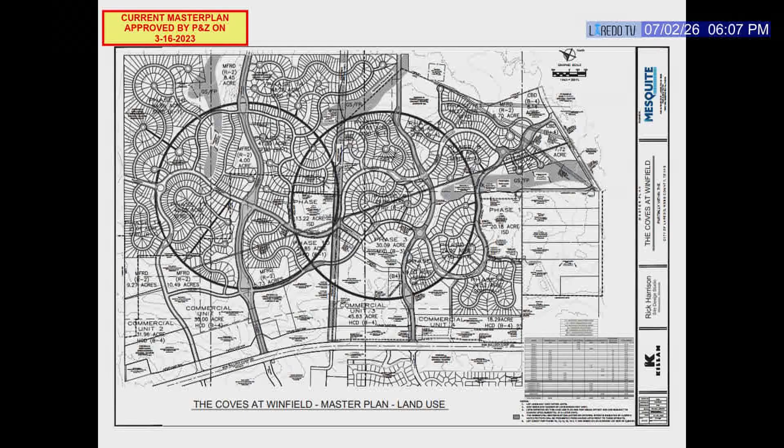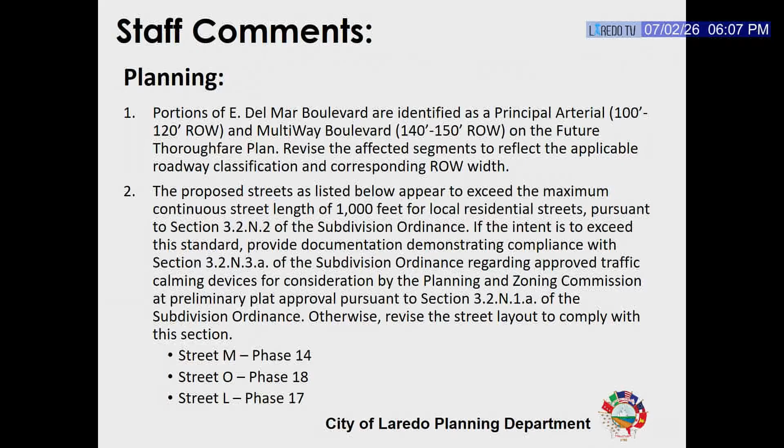Location view, aerial view, the current plan — this is the master plan that was approved March 16, 2023 — and the master plan revision submitted. Comments from planning, comments 3 to 6, comments 7 to 11, parks, and traffic safety, comments 3 to 8. And the proposed motion.

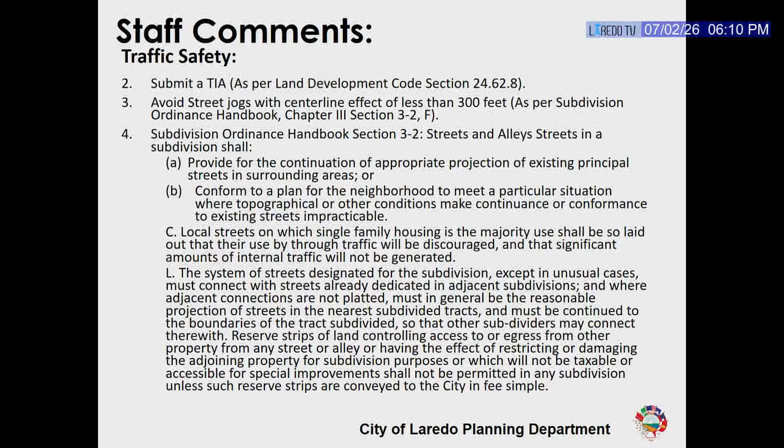Staff comments: planning comments 1 to 2, 3 to 6. Next are parks and fire. The next is traffic safety, comments 4 to 4, comments 5 to 6. And the proposed motion.

Okay, yes sir? Good evening, Mr. Chairman, members of the commission, or Madam Chair, who just, I saw walk in the door. I'm going to hand out a packet here for everybody to see. Mr. Wires, I'll let him go ahead and get started.

Hello, Mr. Chairman, Commissioners, Danny Wires for the record. I just wanted to give you a little background on the tract and what we're determined to do, and that's affordable housing, and the unique characteristics of this tract.

For several years, in fact my entire career, I've always looked for tracts of land that we can take care of the lower half, and now it's the lower 80% of Laredoans that are looking for houses. Well, this tract, by fate or...

I first offered to buy the Richter farm from their grandfather 40 years ago. And the Richters are very proud of their farm and hard to deal with. Last November, the opportunity to buy it came up through months of negotiation on prices. We came to a number that would work solely for the purpose of affordable housing. And the reason it works is it's...

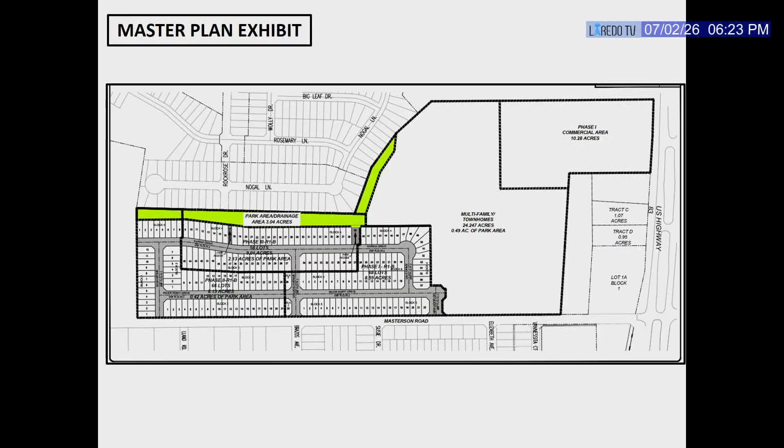And then we're having to explain it to you when we're asking you to remove it from the agenda, from the comments. So just a comment - I wanted to reiterate kind of what Mr. Novato did, but I think I got too far into it because I still have these two other things I want to talk about. So just in reference to that, I wanted to let you know.

As far as planning goes, we agree with all the rest of the comments except for comments number 1 and 2. Comment number 1 is referencing the extension of Rockrose Drive, located along the northern boundary of the subdivision.

So if I can get this to show up. All right, let's see, where am I? Yeah, like that, let's see. Yes, like that, right there, okay. Okay, let me get a pen. Rockrose Drive is actually - let me see where I'm at, it's actually right here. Oh, is that it? No. Why don't you put this one up? Let me follow. Oh, okay. Well, it's because this one shows a little bit more of the circulation, so let me get on this side of it, and that'll actually help.

Rock Rose Drive is actually - you had an arrow to it - right there, that's Rock Rose. This is Rockrose Drive, and this is what they want to extend down into the subdivision. As you can see, this particular River Hills subdivision came back before you. At that point, staff asked for that particular extension to be extended. The engineer was not in favor of it because he said he has a loop - River Hill Loop, which comes all along here. This is River Hill Loop, the internal circulation they had for the subdivision. Their signalization is on the north side, and on the south entrance or exit, that's just where they go in and out - it's a right turn in, right turn out.

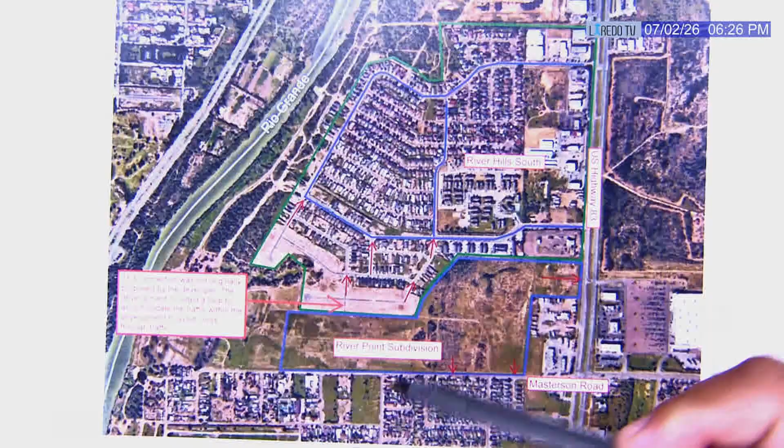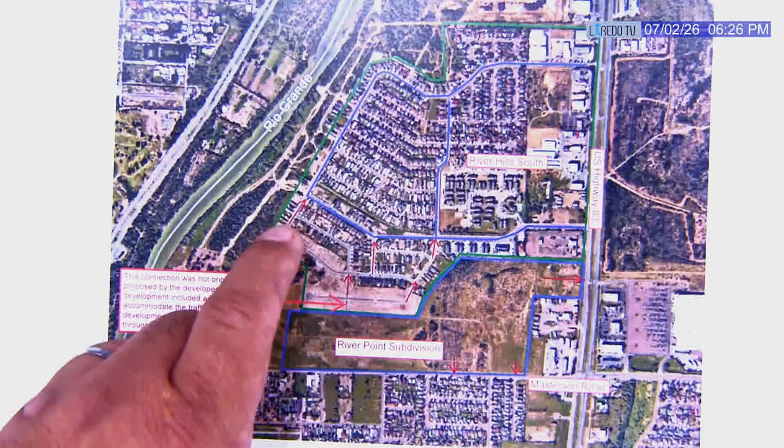So they have that cared for, and what we feel is this is kind of burdening the last piece of this tract, the last development going in here, having to find a way to bring this road in. Initially it's not a through street, because the through street is over here on the south side.

This is Brazos, a 50-foot road that was just extended to see that we had a connection, and it doesn't go anywhere but to the next road up. So it's not a through street, it's just creating additional traffic. And so what it does to us, if you bring up the master plan, can you pull that up? You see where Rockrose is at right there? I don't have a pointer.

Right there. But it comes straight down and goes into the middle of one of our blocks. So that block will now carry the circulation that comes from River Hill Drive, or River Hills subdivision, completely. It's gonna cross through and come out on Brazos Avenue. That's gonna create a dangerous situation in our opinion, because you're gonna have additional traffic flow going there as opposed to what we'd have just from our subdivision generating itself.

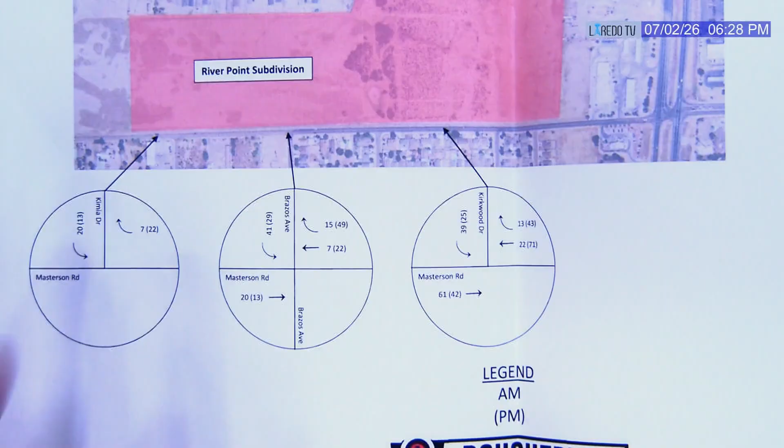We have, from the traffic engineers assisting us with the TIA, you can see... I think you have the exhibit inside your packet, but the first one is Exhibit A. Okay, Exhibit A, you can see the far west drive, which is Kimia.

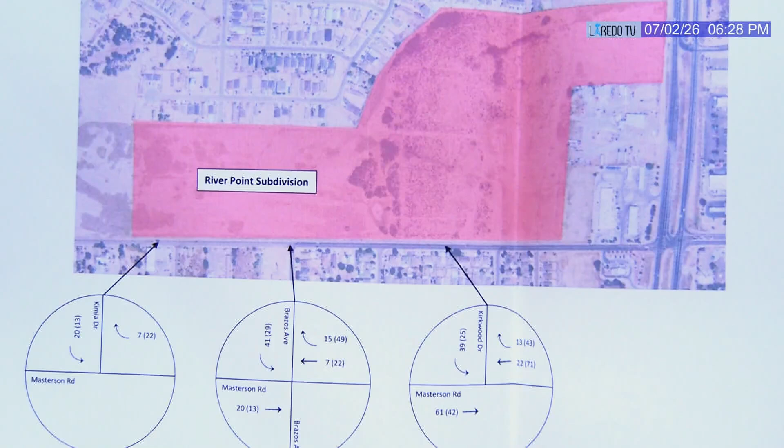That one generates, at least — this is just the generation of flow based upon the subdivision, what you see right here in front of you, which is the R1B. You can see it'll generate probably about 30 trips per day, whether coming in or out, depending on whether it's AM or PM. And then you can see the center, and it keeps adding up as you go and work your way towards Masterson, towards US Highway 83 along Masterson. So that is what you see just with our subdivision.

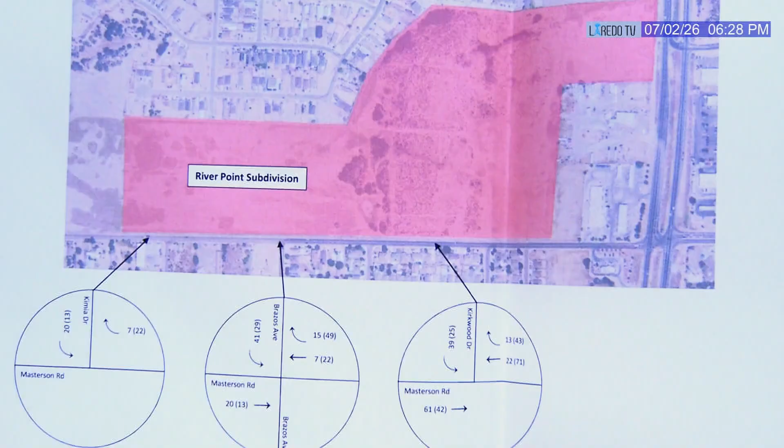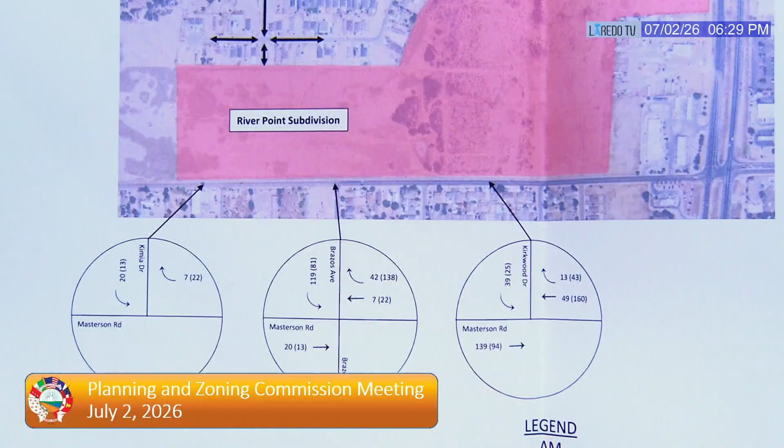Now, if you turn around and bring in this one — this is adding in the traffic flow that would come from River Hill subdivision. Is that Exhibit C? This is Exhibit C, yes ma'am, this is adding both of them. Actually, Exhibit B shows just the traffic flow from River Hill, but this one, C, adds them all up together.

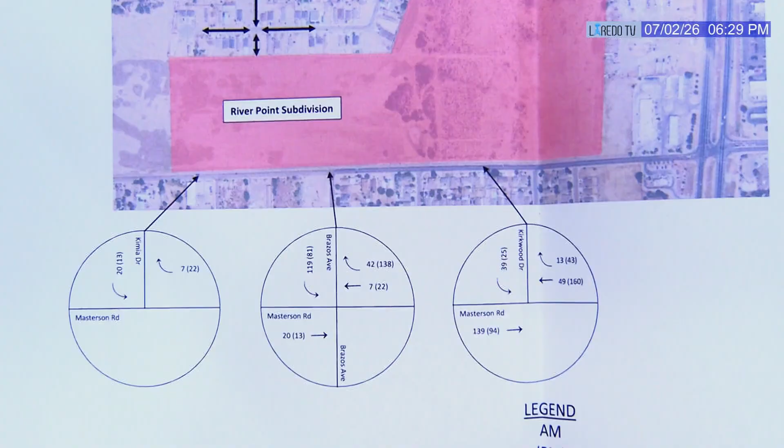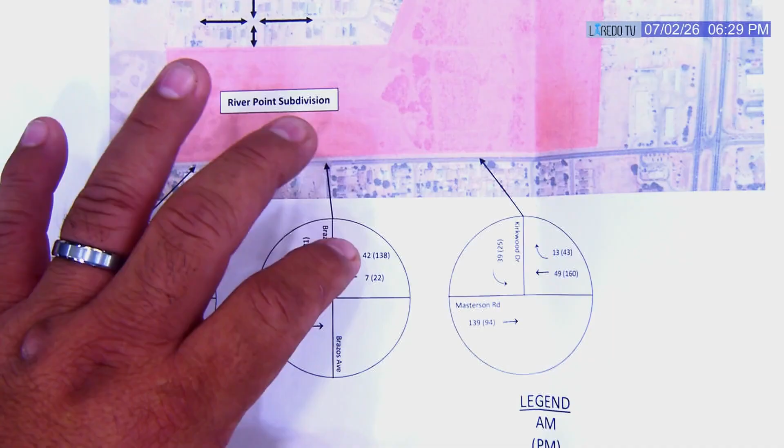So, Exhibit C, as you can see, the majority of the traffic is gonna be concentrated on Brazos, and that adds up — if you start looking at it, you're seeing about, you see 100, it says 119 and 81, that's 200 trips, and then you see 42 and 138, that's another 180. So, that being said, you're seeing 400 trips. 400 trips being generated on a daily basis, and you're putting it in that little small section where those lots are gonna be. It's gonna create a dangerous area.

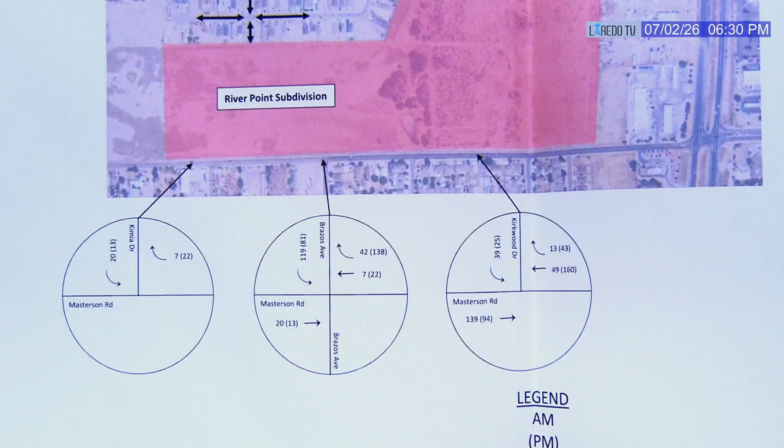Maybe not all the time, but at some point, with that many cars going there, it's gonna create a problem. So that is why we are concerned with the fact that they want us to extend the road into the subdivision. And we understand their concern, but it's hard to accommodate something when it's gonna create a problem in that particular sense. It's gonna be a dangerous problem, because we're gonna have those 400 trip generations coming daily. That's what you're gonna be seeing.

Can I ask a question to staff? What is the purpose, or the reasoning behind the unusual case I see here on planning, item 1, that on is just connecting the subdivision with the street, and then passing also a drainage canal, to connect these two subdivisions. What was the reasoning behind it?

Well, the comment is just quoting the subdivision ordinance, right? It just says pursuant to the subdivision ordinance, the street system designated for the subdivision, except in unusual cases, you've gotta connect, right? So that's why we noticed on the master plan that the stub out on the north subdivision — they were not proposing the connection in their master plan, right?

So that's what we're calling out. The subdivision ordinance requires everybody to abide by the stub outs from previous or recorded joining subdivisions. That's why we're saying make sure that you connect, and revise your master plan in order to connect. I think that's what you're asking about. Yes.

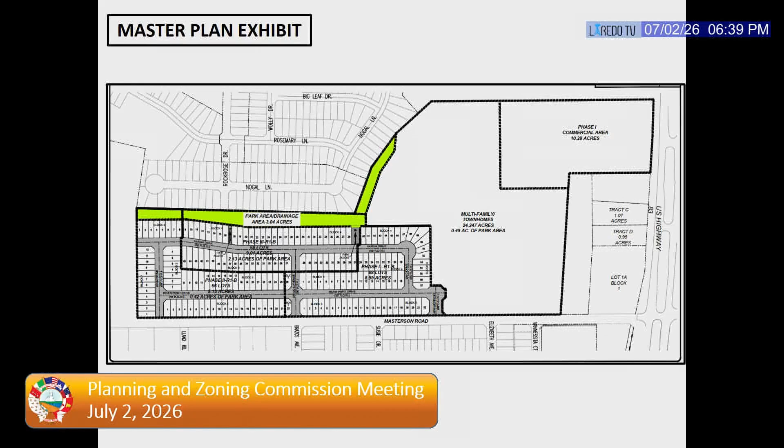And then it looks like the subdivision north, Rock Rose Drive, also has access to the park area, so it connects through Rock Rose, yes ma'am. Yeah, so actually for walking and biking, it's probably safer to keep cars out of the area if the purpose is pedestrian safety. I agree.

Does Rock Rose currently connect to what you're proposing to have as a park area? That's where it dead ends, yes sir. It is already in existence? Yes, and we looked at it. It also meets the turnaround standard for fire, so the fire truck is not in a dead end.

But Ms. Portillo, that's an excellent point. In fact, Luis brought it up this morning, that instead of spending money on a $200,000 plus road, let's spend the money actually making these improvements, because this is a nice level piece of land, beautiful as it flows down to the river. Let's go ahead and improve those hike and bike paths for park access.

River Hills has access to the linear park also, and that is a benefit to both an existing subdivision and to the new one. And yeah, we're trying to promote walkability and biking, and yet we're doing a road. So we're talking out both sides of our mouth on the plan, but I like that idea. Yeah, I think it falls under the unusual cases.

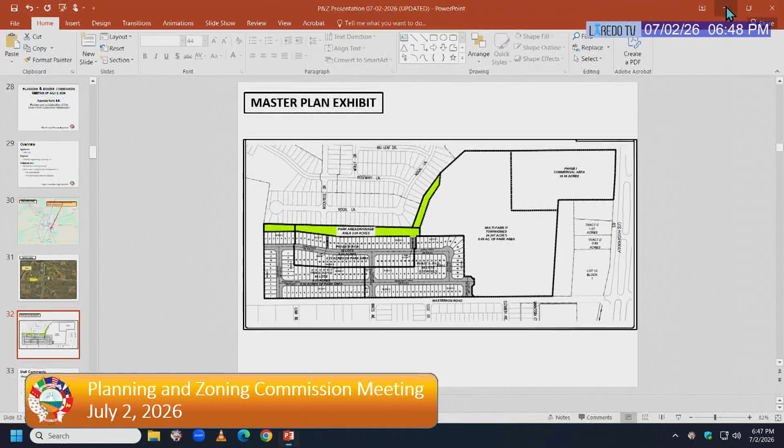Okay, because it brings up the subject we had last time. There's gonna be a lot of cars parked in the street, adding to traffic in a street that's already full of cars parked in the street. R1Bs are required to have 3 parking spaces on the lot. Required and used are two different things, but we know that. The ordinance does provide at least, acknowledges the increased density and the need for that extra parking on property.

No, Mr. Montgomery, you've seen it before, just like I had, checking our subdivisions at 7:30 to 5:30, and that's why I disagree with the RICO guys. They haven't lived the streets of Laredo. They say people want parks, not parking. All of my customers want more parking - that's more important to them than that.

So you've got cars parked on both sides of a 50-foot right of way, and then add another 400 cars more. You're asking for problems and delays.

Who did this traffic analysis? Was it a third party? It's Dougherty Engineering. When we come back to you with the higher density, a multifamily deal, which requires planning with the builders, and lot design and park incorporation and all that stuff, it'll be a full-blown deal.

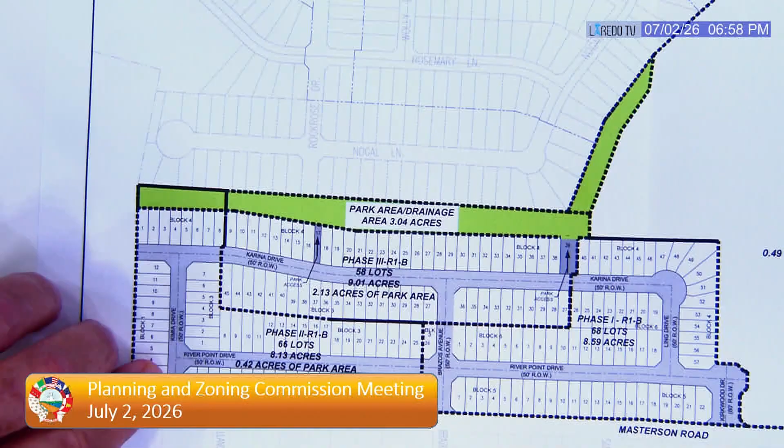The one to the far west, right by the river, we added that in because we have a sewer line that needs to go in, and the city doesn't like sewer lines outside of the road. So that road is to accommodate the sewer line, but the whole idea of the 300 feet is to prevent conflicting turning collisions. But if you look, if Frank can articulate it better than me, there's no traffic when you get to the west end.

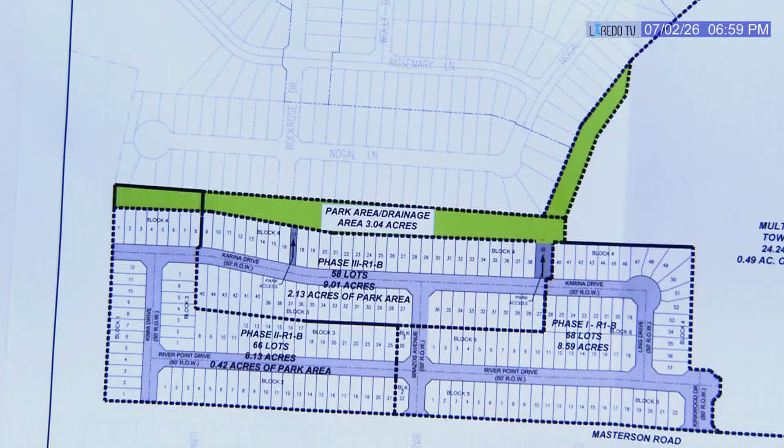We were thinking it's just traffic. I mean, you can't put medians right there, it's just a regular 50-foot right of way, so a median would not work there. So we're thinking something like signage or coordination instead, since a median is a little difficult there - the road isn't very wide. Yeah, that's what I'm saying, in that particular area you can't put a median.

But we'd be more than happy to work with traffic, Mr. Peña, and make sure that we put in what the city would require. I don't know how you want to reword that particular comment. I guess we could keep the comment as is, or coordinate - I guess the 'or' would work, right? There's 'or' and then coordinate with the traffic department for possible median and or traffic mitigation measures. That works, yes.

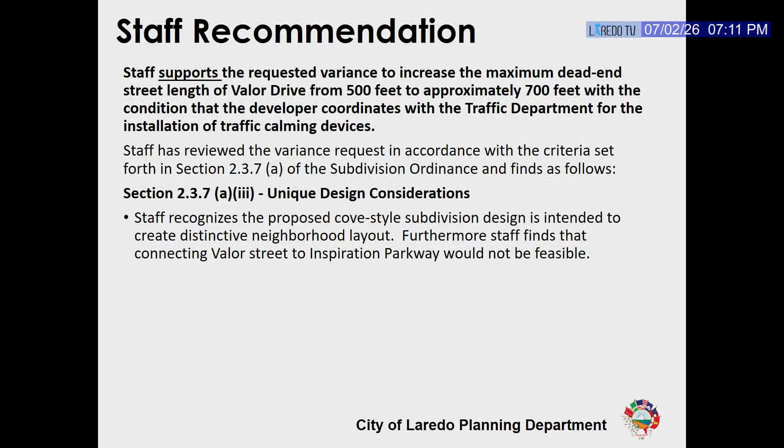The staff recommendation in the packet said initially staff does not support, but after conversations with the engineer and developer, we went ahead and supported the variance for the following reason. We recognize that the proposed Cove-style subdivision design is intended to create a distinct neighborhood layout, so as staff we found that to be a unique design consideration for the variance.

Because this is a variance request under section 2.3.7A, the commission by a 2/3 majority vote of those members present may grant the variance. Pursuant to that section, the commission shall make findings to justify the decision to grant the variance, and those findings will then be put into the official minutes of the meeting.

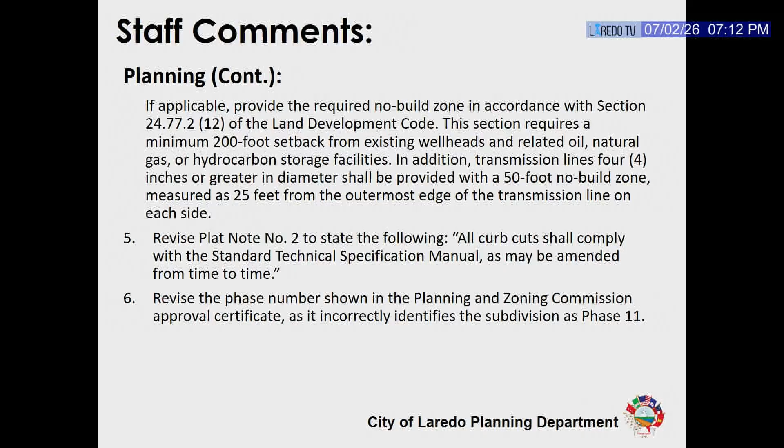Staff comments: planning items 1 and 2, 3 and 4, 5 and 6, 7 through 10. Comments from Parks and Fire and Traffic Safety, 3 to 7, and the proposed motion.

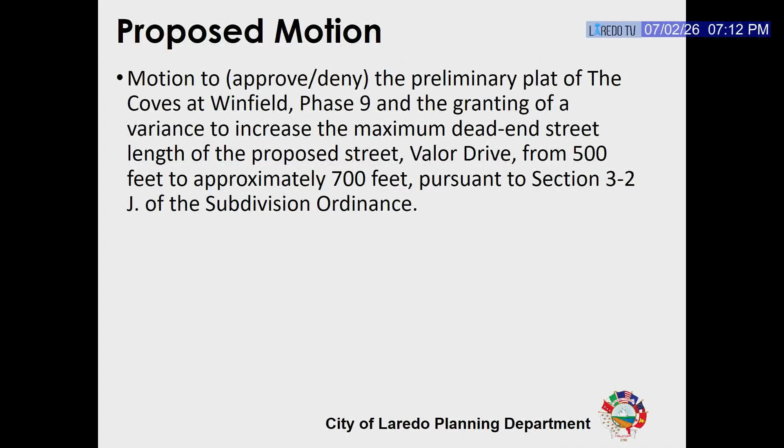This is a public hearing, is someone here to speak for the design? Yes, Orlando Navarro for the record. I don't know if we can get the projector.

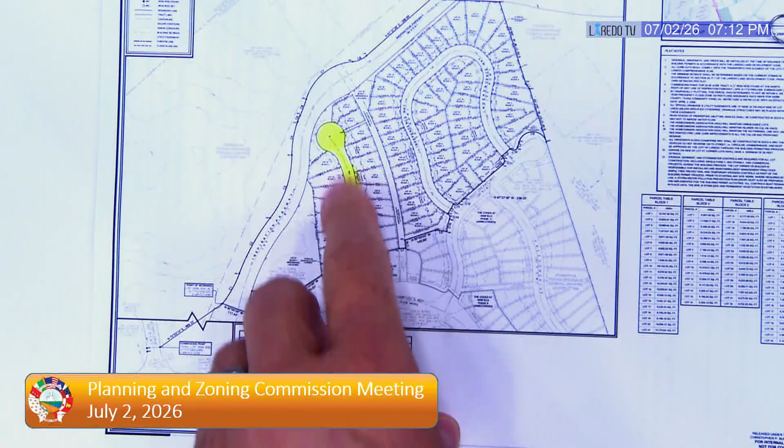Mr. Vedati, can you tell? There you go. So, all that being said, we have this road right here, and what we did was we made it a cul-de-sac because we didn't want traffic to hit this major road, so we're having it come out this way.

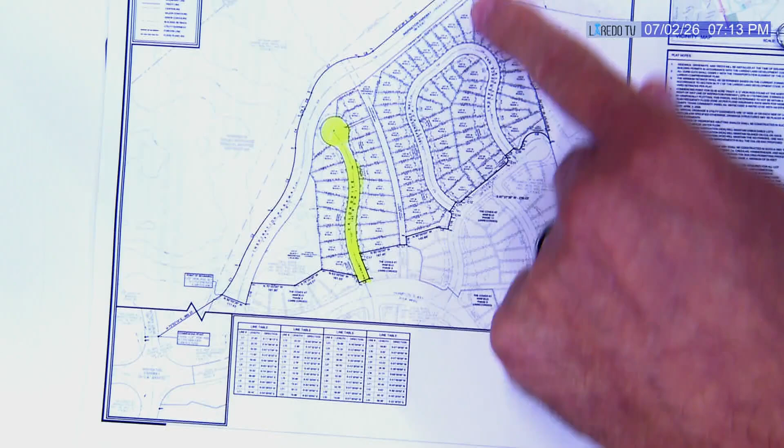So we did this for more of a safety issue, and because we did that it extended our street 200 feet. But the purpose was just for safety, so that you don't have left turns, and you could see the curvature there. We didn't want to come out right there because of the danger of the line of sight.

Mr. Chairman, we had a really good conversation with the applicant's representative today. If you notice in your packet, we had originally looked at this and according to the requirements under the code couldn't find the necessary justification, but after those conversations they brought to our attention some very important points with regard to the length.

They really have two alternatives: they either shorten the length of the street, which would result in land that becomes typically unusable, and that's something that would trigger the variance request if it deprives the landowner of any reasonable use. Or, the other alternative would be to turn the road and punch out onto the other road, which would eliminate the issue with the length of the dead end.

However, because of the curves, we noticed that the sight distances posed concerns, very significant concerns for us. So in this case, because of those conversations and the additional analysis, we were able to support this variance.

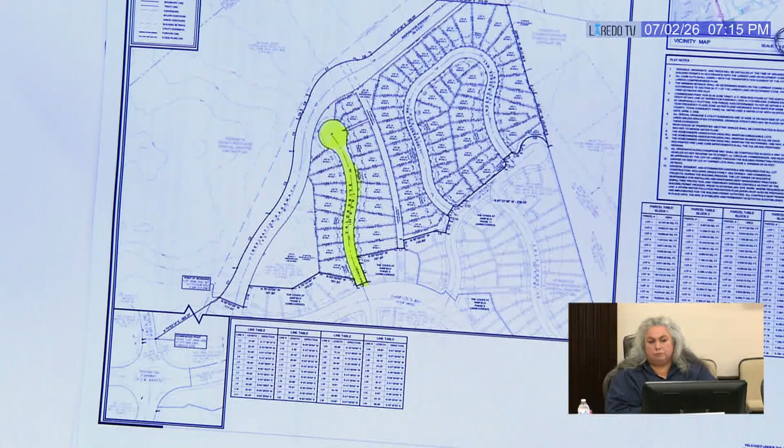Okay, that's it? Yes. We have a motion? Does anybody wish to speak against? Is anybody here to speak against? No? What are the wishes of the commission?

What would be the proposed amendment? Is there an amendment to the comment you would be okay with? No, I think they already did, we supported the variance. Oh, okay, but there was nothing against what's already here?

I'm sorry, I'm not tracking. When we initially looked at the variance request, we looked at the ordinance, and it tells you specific criteria for approving the variance, one, two, three, four. We couldn't find that it met any of those criteria.

But after talking with the applicant today, they were really gracious to come and talk with us and help us see more with regard to those sight distances. So would you say you're supportive of the variance now? Yeah, we support the variance. Okay, motion to pass the variance, subject to staff recommendations.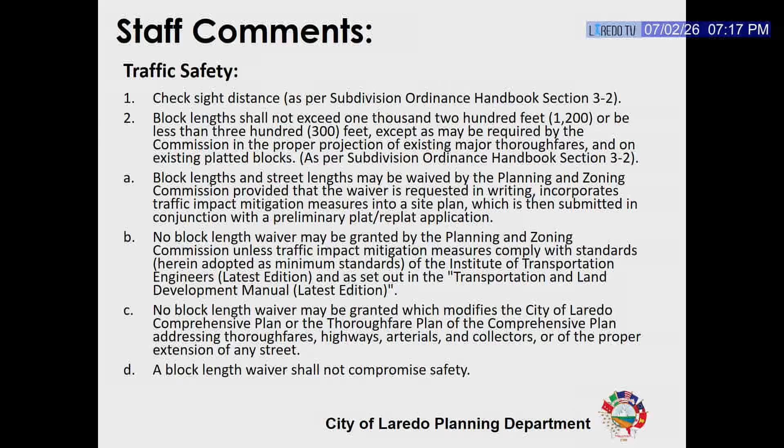The location view, aerial view, the proposed plat, staff comments: planning comments 1 and 2, 3 and 4 through 5, comments 6 through 8, comments from parks and fire, comments from traffic, comments 3 to 8, and the proposed motion.

Orlando Navarro for the record. Just to let you know, in all of our items there's a comment to speak to parks. We had a meeting with parks, and she was here.

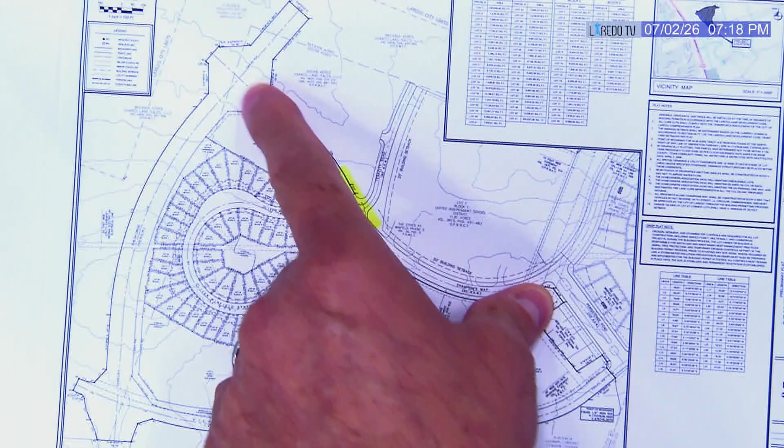So what we're talking about here, this right here is Santos Elementary, okay? And we're getting ready to put this street through to Shiloh. Our subdivision has a street coming out and it's close to this street here.

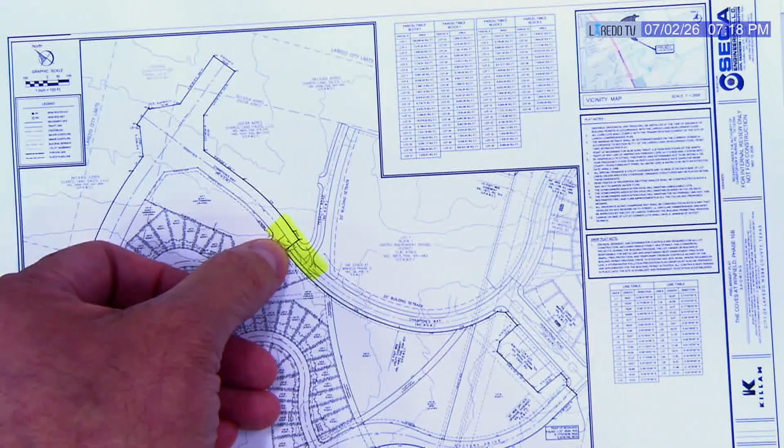But what we were telling staff is we're gonna put a median in, and the entrance to the neighborhood will be a right in, right out. So they won't be able to make a left turn there, they have to turn right, in order to protect the people turning there. That's what we went to staff to let them know was our plan.

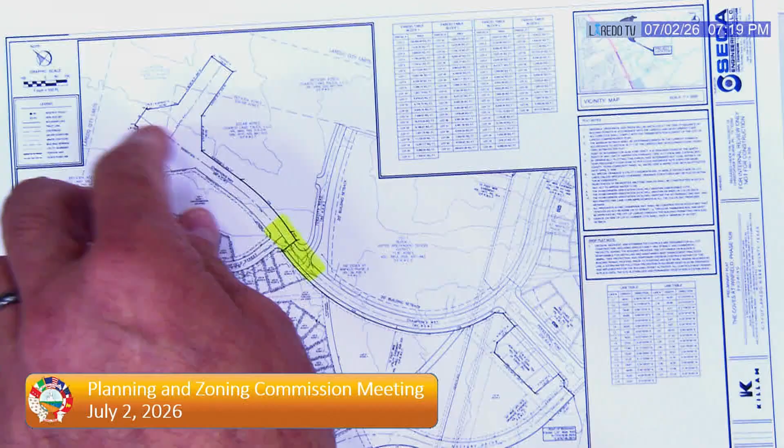We had to go in and specifically talk to them and say we're doing the median, which will limit the access danger. Because we really want the flow of traffic to go, and if you can see on Shiloh, one of the things we're proposing with traffic is to do a roundabout. Hopefully we can keep the families leaving from hitting a stop sign and having one car at a time — this will be a flowing roundabout that'll get the cars out. But we're still working on that design.

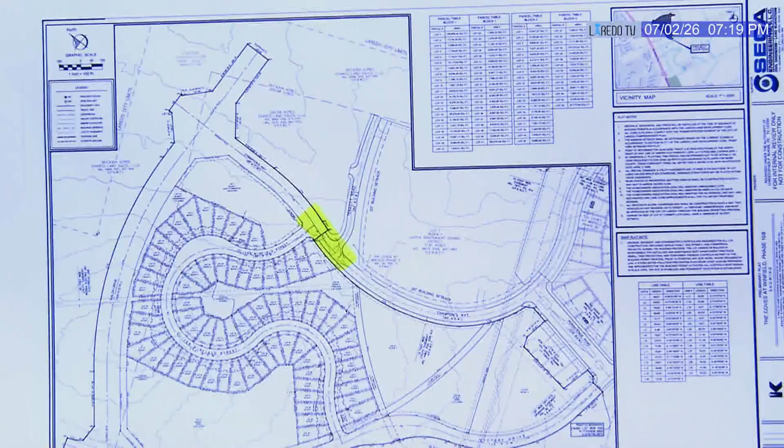It's this one. Orly, I'm just curious, how come the grid system doesn't work anymore? The grid system does work, I thought it was very popular. We're following Rick Harrison's design pattern of doing coves. The coves have a different look — there's curves, it slows down traffic.

We've pushed the houses back, so in some cases we have houses set back about 80 feet. So when you're driving in, instead of having them up close, they pull back — it's just designed for us. One of the things we're also doing is leaving a lot of green space. Whereas in some areas lots would be put on everything, we're holding back some so we can allow green space, and in the future you'll see walking trails we're gonna put in. So there's a master plan to it. But I grew up in the Heights and I'm a grid kid, so it still works.

I don't see that anymore from the developers. Mr. Chairman, pursuant to the applicant's comments, we would recommend adding similar verbiage to what we had on the previous item regarding the jogs — coordinate with the traffic department for possible median and/or traffic mitigation measures. That's on planning comment number 2. So this comment would remain about the street jogs, but add the coordination with traffic department language.

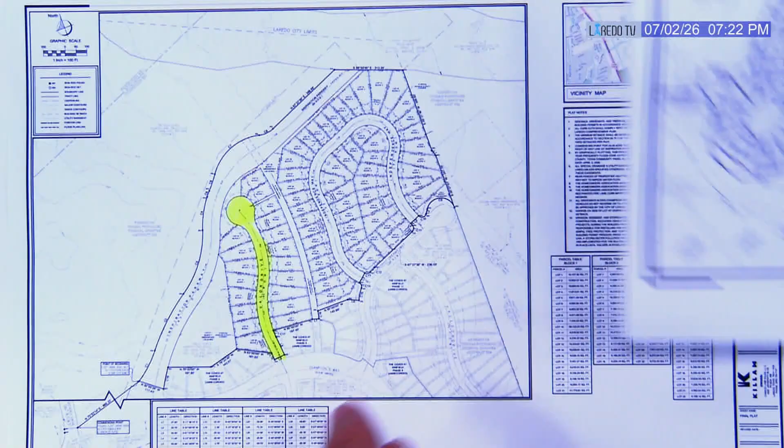Let me see if I can explain it a little easier using this. So this is the neighborhood that we're talking about, but you can see it better here where it comes up and hits this point.

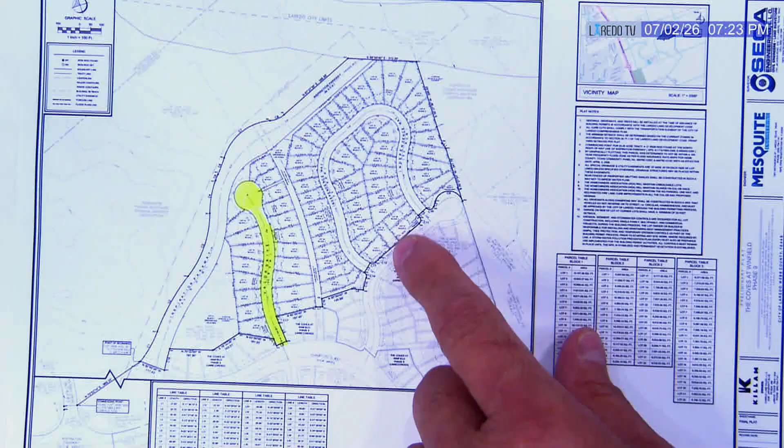We're asking to allow for this connection, and the reason we think it's okay is it's a cul-de-sac, so through traffic's not gonna go through here. We've done a traffic study that we're turning into the engineering department, and it shows a very minimal number of cars. So what we did was, because of the minimal traffic, we'd like to keep that connection.

Do you have that? They didn't bring it up on the other one. I think with regard to this one, are you talking about the street jog comment?

This is what we sort of came up with. We wanted to call you, but time ran away with us. So I think what Mr. Navarro is identifying is comment number 2 regarding the street jogs.

So there's the distance between, what is the name of the westernmost loop street intersection? Independence? Correct. So what we thought is making the intersection of Independence, the western one, would be no left turn, right here at this point.

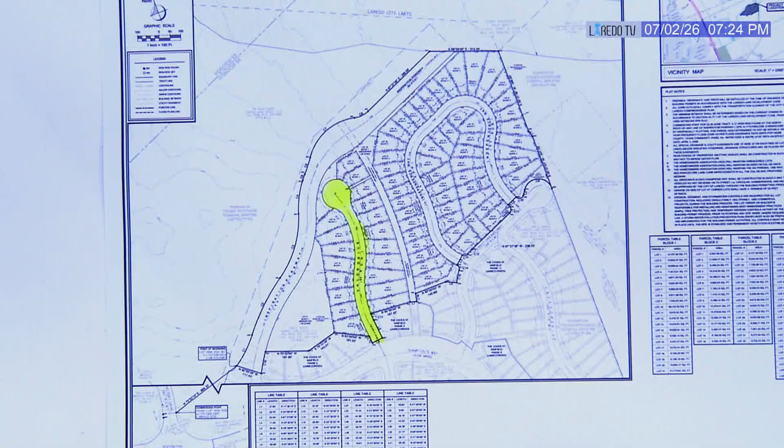Make that a no left turn, so that the cars cannot go that way and come into conflict. They can go any which way, but here they just cannot come to the left, they'd have to go to the right. Some possible signage at the intersection identifying you can go right, you just can't go left.

They can come in, and like in our conversation, the majority of the traffic on this side would come this way, and this would go that way. So it's just some signage, so long as these don't go left, you don't get the conflict of the cars going there at that point.

We'll look at that, and if there's any issues, we'll have to talk to traffic, the one-stop shop and traffic. Just no left turn. We'll give it a try and see if we can put that together. Any other comments?

Motion to approve, subject to staff comments and amending comment number 2, so that the comment would say that the western intersection of Independence Way shall have no left turn. We're gonna have to work with the one-stop shop and traffic on that, so we're gonna have to go round and round with that to see if it works.

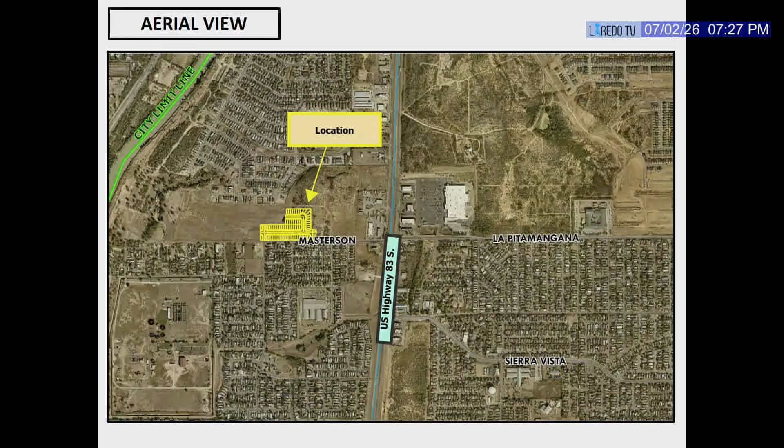Location view, aerial view, the proposed plat, staff comments: planning comments 1 through 4, comments 5 through 7, parks comment, fire comment, traffic comments 2 to 4, 5 and 6, and the proposed motion.

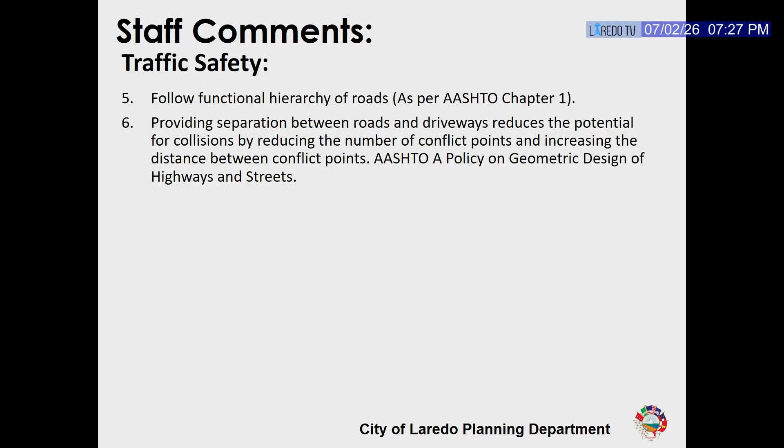Good evening, Madam Chair. Frank Seiler with Sherfey Engineering. We pretty much concur with everything, except for traffic comment number 2, which was on the master plan, and adding the same type of verbiage on item number 1 of planning, which asks us to go before the traffic department. Other than that, we concur with the rest of the comments.

What are the wishes of the commission? Motion to approve, subject to staff comments, amending item number 1 to reference similar language as the comment given for this item on the master plan, and eliminating comment number 2 of traffic. Second. All in favor? Aye.

Motion passes. Thank you. 9E, preliminary consideration of the plat of J Alexander subdivision unit 33, and the granting of a variance to reduce the front yard building setback line of lot 7, block 3, from 20 feet to 10 feet pursuant to section 24.77.2 of the Laredo Land Development Code.

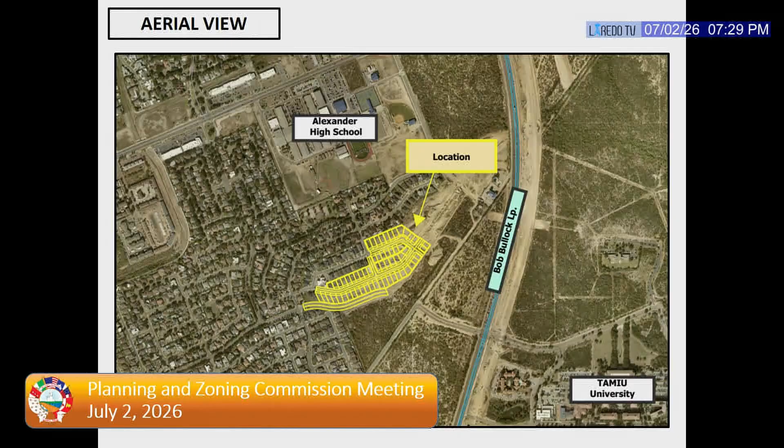This intent is residential. The applicant for the record is D&J Alexander, engineers Premier Engineering. The proposed use is single family. The current zoning is R1. Location view, aerial view, the proposed plat.

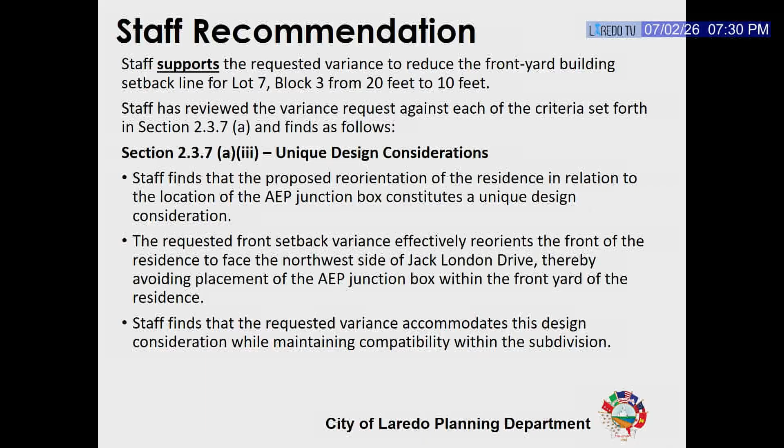Staff supports the variance. We find that it applies for the unique design section. Staff finds that the proposed reorientation of the residence in relation to the location of the AEP junction box constitutes that unique design. So based on those reasons, we believe it qualifies as a unique design under that section. Because this is a variance request, under this section the commission by a 2/3 majority of members present may grant the variance. Staff comments: planning, parks, fire, and traffic comments, and the proposed motion.

Good evening, Madam Chair, members of the commission. My name is Armando Guerra with Premier Engineering, representing the client, along with Eduardo Gutierrez with Premier Engineering. I wanted to start with a little background. This project has already been previously approved and has gone through the process. We're actually 95% into construction; all the streets are paved. It just took a little longer than normal, so we're coming back as a formality to apply for a preliminary and final plat again while they finish construction.

The client did request, since we were coming back to preliminary, to address just that one lot. Here's the lot they're talking about. We already know what's going on here since they're already installing the dry utilities. I don't know if... how this works, sorry. Just like that, fix that? Yeah, okay, sorry. So basically, it's this lot right here.

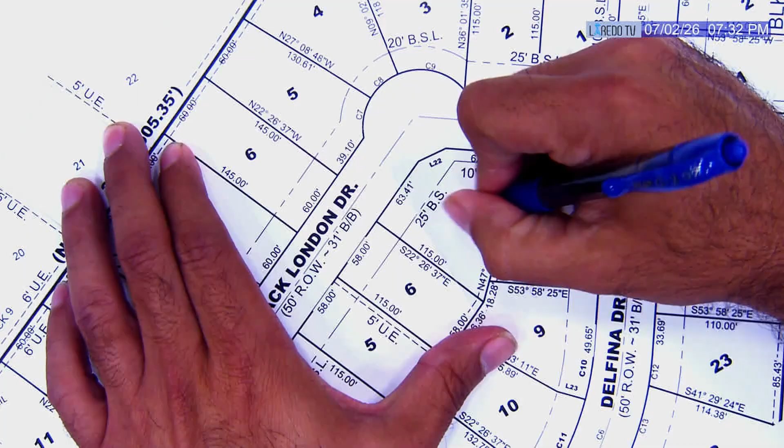The original plat had the home facing Jack London this way. When AEP came and installed all the dry utilities, they put a huge junction box right here, which was going to be in the front of the home. So that's the reason why the client decided to face the home this way, so that the box remains in the backyard.

And that's it for the variance. Since we had already gone through One Stop Shop, I don't know why the traffic department copied and pasted all the previous comments again. So we're requesting those be removed, but I do have the letter from them, which they just sent me, acknowledging that it's 95% complete and that they previously approved the project, if I can present it.

Because I think this had already gotten final plat also. It had already gotten final plat, correct? Yeah, it already got approval from traffic. Okay, and that's our request. And just to give a little background on this one, they are, like you said, almost complete with the subdivision. They had already gotten final plat, which gave them permission to construct. This was just a last minute thing.

We did show some pictures of that box, it's pretty significant. Unfortunately, because of the design, they were needing a variance, so they had to come back to P and Z. It's not something staff could do administratively, so they had to go through this process to get it here. They'll be going back for final pretty quick, probably on the next one.

Madam Chair, motion to approve, subject to comments and striking all of the traffic safety comments. Second. All in favor? Aye. Motion passes. Thank you.

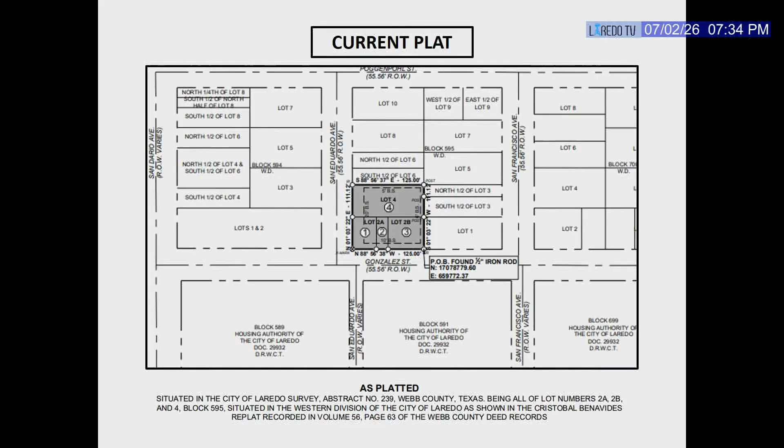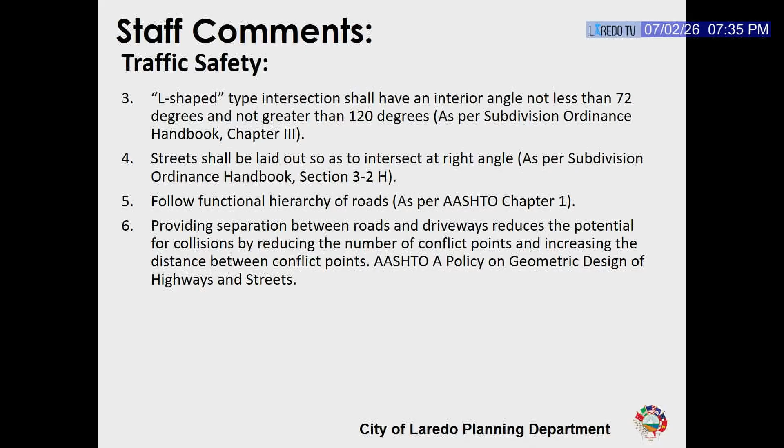Staff does support the variance. Again, because it is a variance request, 2/3 majority of those members present may grant the variance. Staff comments cover planning, parks, fire, and traffic. Comments 3 to 5, to 6, and the proposed motion.

Good evening, Madam Chair. Edward Ochoa with KCI Technologies for the record. We didn't have any issues, though I think some of these comments on the screen are different than the ones in my packet - that L-shaped intersection isn't related to us. But we do concur with the comments that are part of the packet, just for the record.

That's correct. Okay, thank you. Relative to this, yeah, I concur with staff comments. We don't have any issues. I'm open to any questions.

This is a Laredo Housing Authority project - they purchased a property right across the street from the existing housing in the San Francisco Avenue area, and they're putting in some apartments. The apartments are going to be 100% for senior living. Based on the apartment space and what we have to do to make them ADA compliant, it's causing the building to be a little bit bigger, so we wanted to get a setback to address that issue.

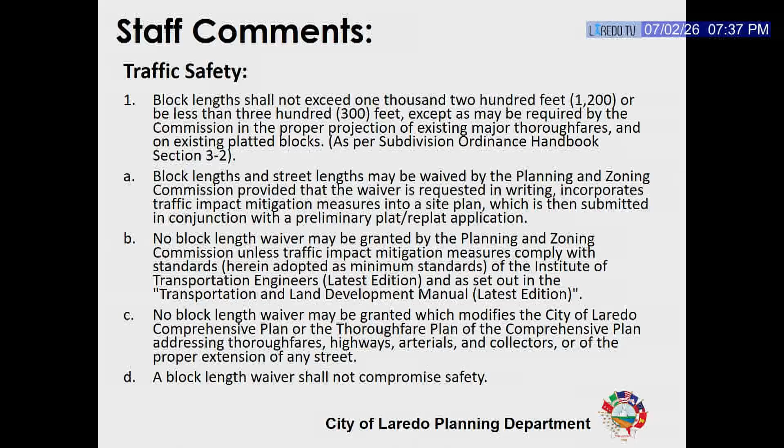9G, preliminary consideration of the plat of Harmony Hills subdivision, Phase 3 at Rodriguez Ranch. The intent is residential. Madam Chair, the applicant is Rodriguez-Zertuche, engineers Howland Engineering, and the proposed use is single family. The current zoning is R1A. Here is the location view, aerial view, the proposed plat, staff comments for planning, comments 1 through 4, parks and fire, traffic safety, and the proposed motion. Thank you.

Good evening. For the record, my name is Aaron Gonzalez, an engineer with Howland Engineering. I asked that traffic comment number 1 regarding the block lengths be removed. I had to look into what she was referring to with this comment, but I believe she's referring to the block along the south end - it would be block number 10, if we can pull that up.

Yeah, I'm pretty sure she's referring to block 10, which is the south distance. That's 1,400 feet. It says block length is 1,200 feet. We've seen this in industrial subdivisions where the blocks exceed over 2,000 to 3,000 feet. We're familiar with this ordinance. Just about every plat we submit, it's a pretty common comment of hers that she puts it on almost everything. Like I said, we've done it in industrial subdivisions, like Beltway and the North Webb industrial subdivisions, where those blocks far exceed that. We feel that this one being 1,400 as opposed to the limit 1,200, so we ask that this one be scratched.

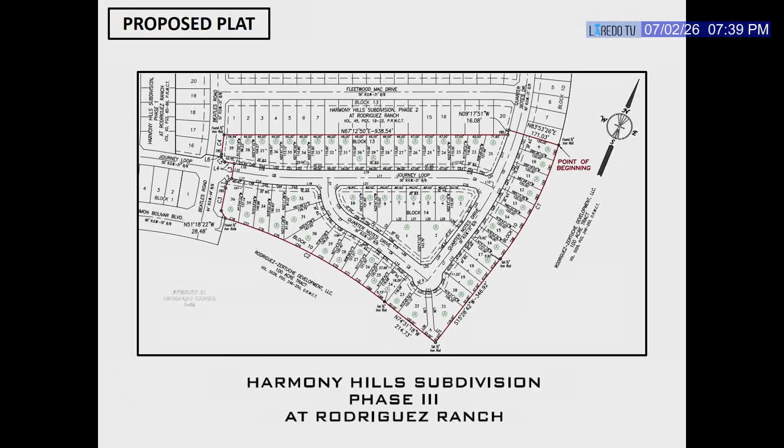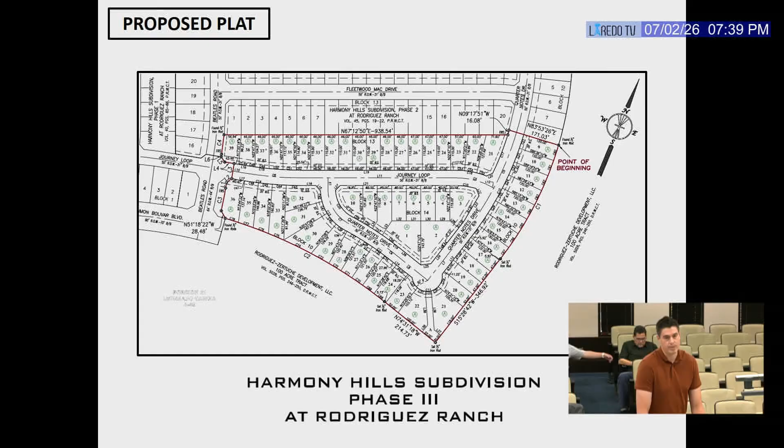We're not really proposing a new subdivision, it's kind of finishing off Journey Loop and the phase above it as well. So we ask that one comment be scratched. We're fine with all the other comments. That's the only one that we want to have scratched.

Okay. Madam Chair, what are the wishes of the commission? Just to check, any comments from staff? Do you guys have any comments about that, about the 1,200?

Really? No. Okay, you're fine with it? No, they got the intersection. Okay, I went through the other traffic comments. I'm not sure if they're just copy and paste, because the other 3 comments, I don't see where she's getting them from. We do meet the 90 degrees on the L shape. It's between 72 to 120. We meet 90 exactly, the intersections do curve at right angles. And I don't know what she means by number 4, but yeah.

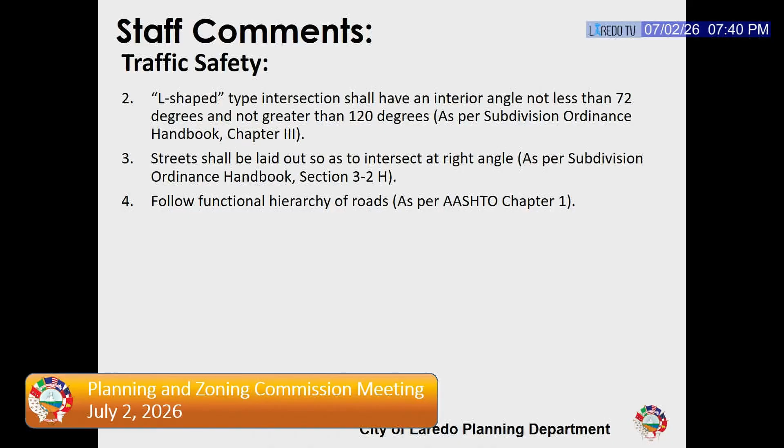I guess I wanted to add, and I know we hear this quite a bit, we do make every effort to put this packet out the Friday before this meeting. We just wanted to encourage anybody with questions to feel free to approach staff. Give her a call, everybody's doors are open. If you have questions, I'm sure any staff member would be happy to meet with you, to clarify or expound on anything you were unclear with.

Yeah, I've spoken with engineering and traffic on this a lot in previous projects. It's just that if it doesn't get scratched here, since we don't have a traffic director, it has to go through city engineering, and that takes weeks to meet the city engineer. So that's the only reason I bring it up. If not, I would have done the comments like I guess we always do.

When you mentioned you don't know what she's referring to, you could call her and ask. Typically when I call traffic, she's like, oh, I'm citing ordinance, just make sure you follow it. I get that, but don't put the comment unless you genuinely think it's an actual concern. If you genuinely think it's a concern, put the comment, but don't just cite ordinance. We know ordinance, for the most part. So that's like my one thing.